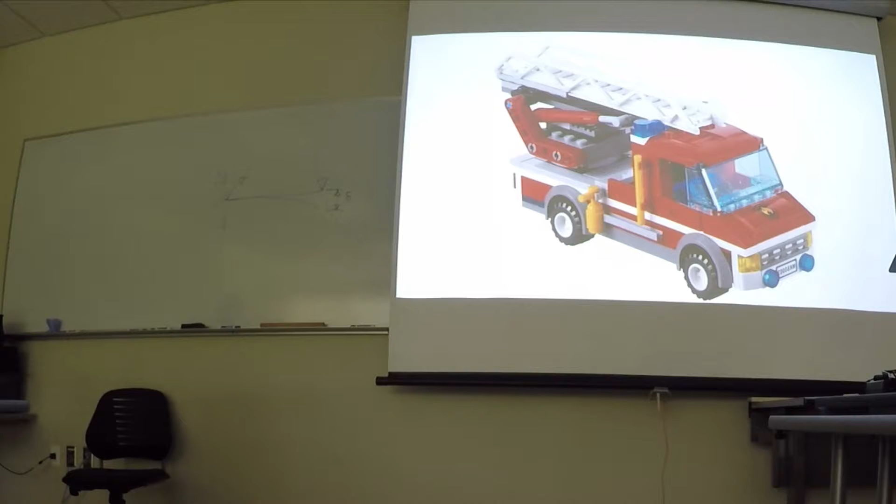Okay, you're going to decide whether this building is going to stand up to, say, 50-mile-an-hour winds. You don't have to model every single bolt and every single joint of the structure of this building. So deciding where to do that is part of the task of things that we're going to learn through this.

Okay? All right, here's the catalog description. We're going to emphasize modeling and interpretation of the results. We are going to look at linear static problems for the most part. We'll have a couple other types later on in the semester, but that's most of our emphasis. We're going to use commercial software, and we're going to verify these through theoretical calculations. And I'll just tell you right now, we are going to do theoretical calculations. We're not going to be doing laboratory tests.

Okay, so you're going to have to solve a problem in SolidWorks. You're going to have to solve a problem using the hand calculation, and you're going to have to compare those two together. How do we compare two answers? Exactly, thank you. You have to calculate a percent difference. I am so tired of reading reports that say it's pretty close. Generally good agreement. Do not put that in your report.

Okay, I want you to say, here is my SolidWorks results, here is my hand calculation, they are 18.3% different. Okay, percent difference is how we compare things. So if it says compare your results, that's a clue, calculate percent difference. So I want to know how close are they to each other.

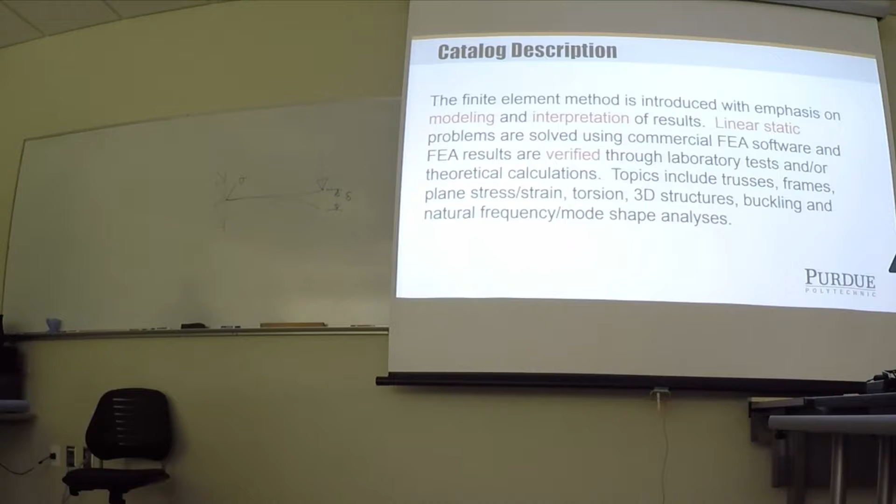All right, so general statements, if you don't know it already. Finite element analysis, abbreviated as FEA. Okay, and this is sort of like ATM machines. Okay, it's not FEA analysis, right? It's not an ATM machine, it's an ATM. The machine's already in the initials. Okay, so this is FEA, finite element analysis. The A stands for analysis. It's not finite element analysis analysis. Just like it's not an ATM, it's not an automatic teller machine machine.

FEA is a method to calculate the loads on a structure for complex situations. It allows us to do structural calculations for things that we can't pull out our 211 textbook and pull out an equation for. Okay? Now, most of what we're going to be doing in here is stuff that we can pull out our 211 book and do a calculation on, because I want you to do a hand calculation and compare it to the SolidWorks. All right?

But the software, once we know how to use it, once we're comfortable, then we can apply the inputs and the constraints correctly. We can define materials and properties correctly. Then we can apply it to problems that we can't find in the textbook. And that's the whole point. The issue is it requires a ridiculously large number of calculations. So doing this by hand is not going to happen. Huge numbers of calculations.

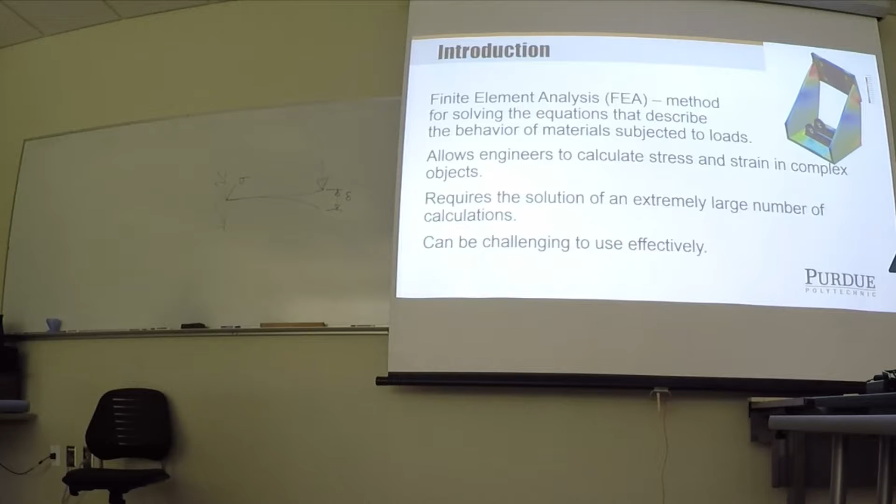All right, so the general procedure, and we'll learn more about this. We define geometry with a solid model. You guys have used SolidWorks to do solid models. We define constraints. We tell SolidWorks, how is this thing attached to something? We apply some loads to it, concentrated loads, pressures, whatever, and then we click a button to solve it.

SolidWorks creates a mesh. The mesh is a subdivision of the structure into tiny little pieces. And then it does a lot of matrix algebra to solve for the forces on each little tiny piece. And then it puts it all back together again and it outputs us a result. And usually that's in a graphical form, which is a colored graph of the problem. And that's color coded. Usually red means high stressed areas and blues and greens mean low stress areas.

Okay? So the general procedure is take a complicated structure, break it down into little tiny simple pieces, do the math on the simple pieces, and then put it all back together again. Okay? So that's in a nutshell. That's what the computer is doing. And by doing it that way, then we can solve complex problems.

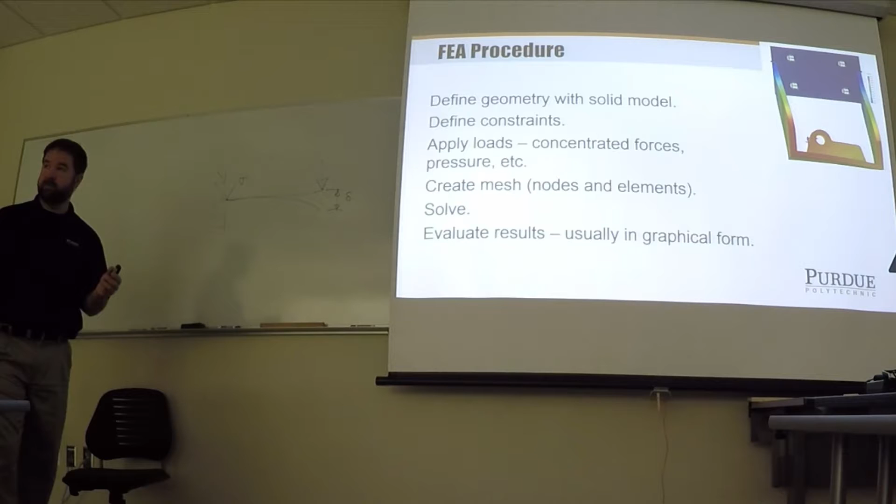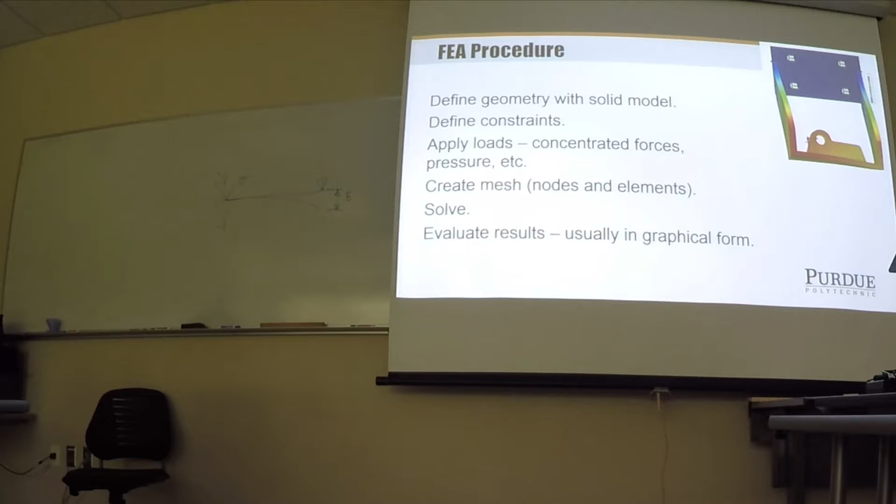And this is used in a lot of places other than just structural places too. I think you hear about people doing weather models that predict the weather. Well, they're taking little pieces of the atmosphere and they're putting in a bunch of constraints and a bunch of inputs, and they're solving it for how it all reacts together. And then it comes up with an output, which is the prediction of whether it's going to rain tomorrow or not. Okay? So it has lots of different applications. We're going to focus on the structural applications because we're mechanical people.

All right. Modern FEA, some of the big software packages, of course, are SolidWorks, which is what you guys are familiar with. ANSYS is a specialized FEA program. In my opinion, it's superior to what SolidWorks has, but it's a separate whole thing. I'm not going to teach a whole other package just for the point of teaching how to do FEA. So we'll stick with SolidWorks.

So of course, as we already talked about, we've had huge increases in computer speed and capacity. The models that we're going to solve will probably solve within seconds. Worst case scenario might be a minute or two. I don't want to harp on stories of back when I used to have to walk to school both ways uphill in the snow kind of thing. But when I was working in industry, it was pretty typical to let models run for days to spit out the numbers. So even just 15 years ago, the advances in the computer speeds and memories and so forth has made this easier and easier to do.

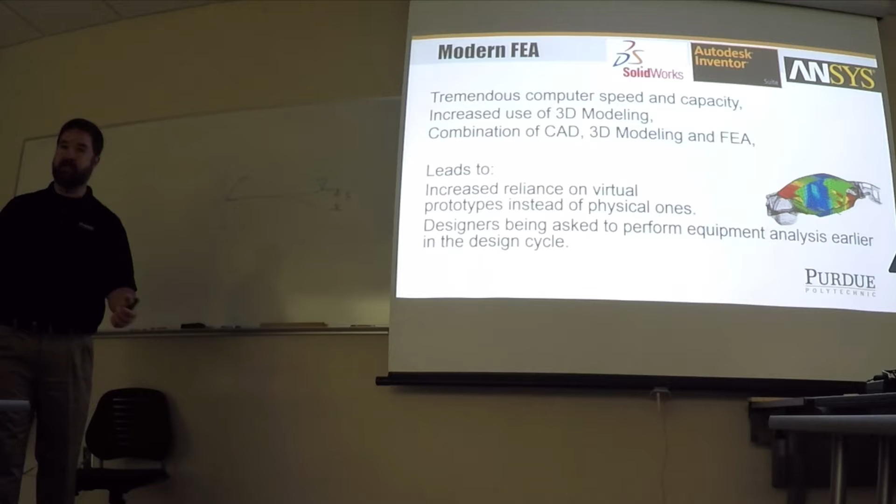Probably the same kind of analogy with the way computer graphics in movies has changed. If you go back and look at one particular example I can think of, there's a movie, Air Force One with Harrison Ford, and there's a scene at the end where the airplane crashes into the ocean. When I watched the movie the first time, it was okay. It didn't really bother me. But the computer graphics are awful. I mean, horrible. And now watching it, it's like, oh my God, I can barely watch this crash because it's so unrealistic.

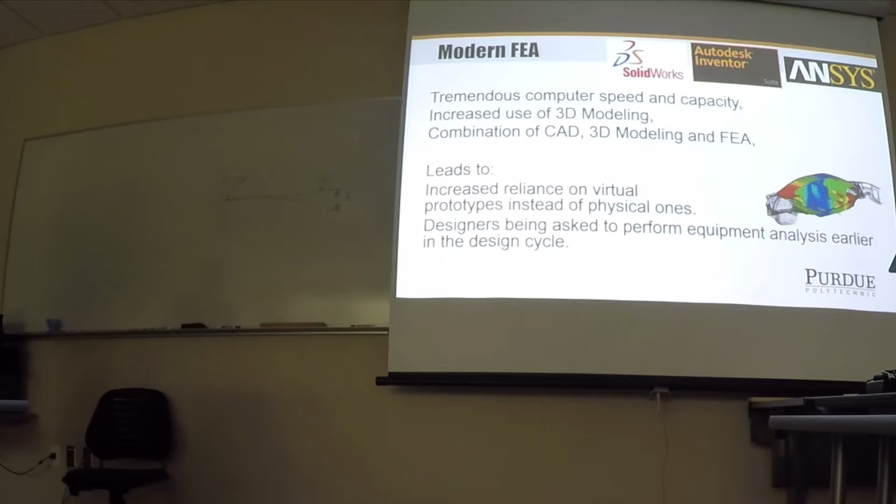But it's a function of when that movie was produced, and the computer hardware and software wasn't as good as it is today, and you couldn't make it as realistic as it would be if we did that today. Okay, and you can tell it. So the same thing's going on with our software here.

I put this on here. This is getting perhaps a little bit dated, but I left it on here anyway. There's not too many traditional drafters around anymore. Almost everybody is a modern designer. I don't know if you guys even see the traditional drafter, but when I first started working as an engineer, the company I worked for literally had people still doing hand drawings on boards with pencils.

So that would have been going on 20 years ago now. So about 20 years ago, they were still doing some paper drawings at the company I worked for. So obviously, we're not talking about that type of drafting. Now almost everybody is doing CAD work. And the issue is that the software has gotten so good that those designers can use FEA to start analyzing problems. It's in the software package that you're using, so you can click through and do it.

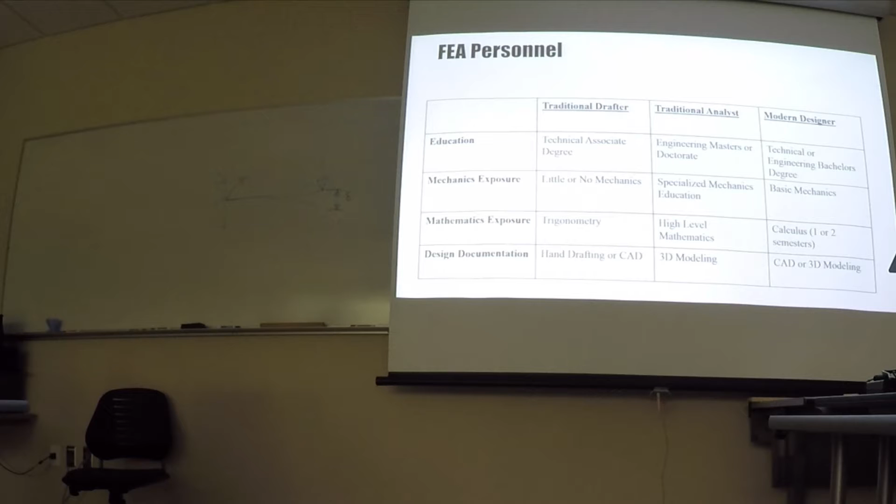And so my point today is to teach you enough about the software that you can be skeptical, so that if you're working with a designer that is doing this for you, you can ask some pointed questions to make sure that the pretty pictures that are coming out are valid. Okay? All right, a little bit of history.

A person named Courant described a polynomial solution for a torsion problem, which was the mathematical beginnings of the finite element method. Companies in the 1950s started using the method. The problem was back in that time that Courant actually did this by hand, and it was a relatively simple problem, but the mathematics was cumbersome and it wasn't very efficient.

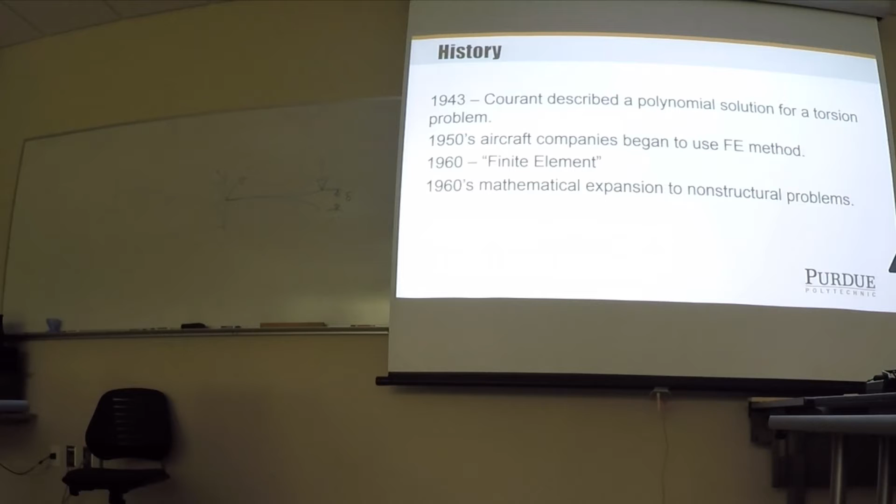We're going to do some hand calculations. Your first assignment is some hand calculations, and we're going to use probably a 3 by 3 matrix at the most, and you're going to hate me for it because of the amount of calculations involved. And we're talking about matrices that are millions of elements, so doing that by hand is absolutely ridiculous. So the value of this is that once we develop computers that can do all the number crunching for us, then this becomes practical. And that's why it's so useful for us today.

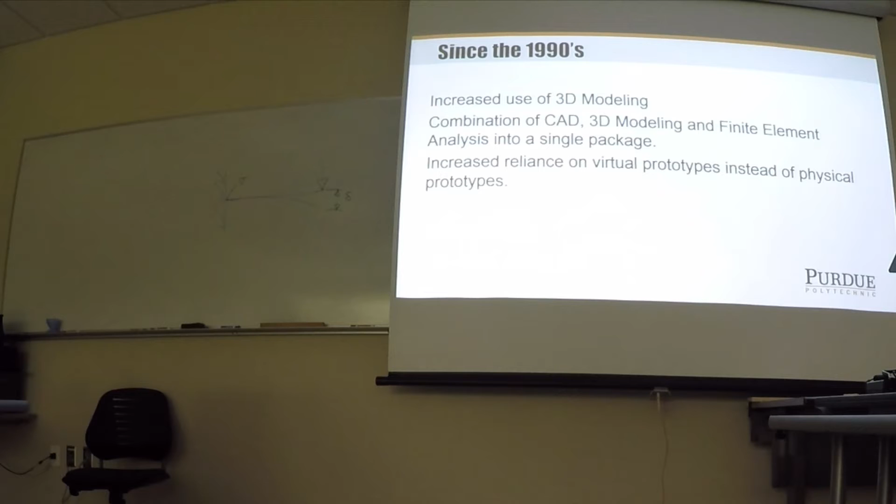So I think we've talked about that already. Increased reliance on virtual prototypes instead of physical prototypes. I think that's kind of obvious. So the concept is we take a structure and we divide it into nodes and elements that connect the nodes together. It looks like my graphic there is overlapping my words. The mathematics of this is a very large system of simultaneous equations. And we solve simultaneous equations with matrices. So the thing we're going to do today is refresh a little memory about matrix manipulations.

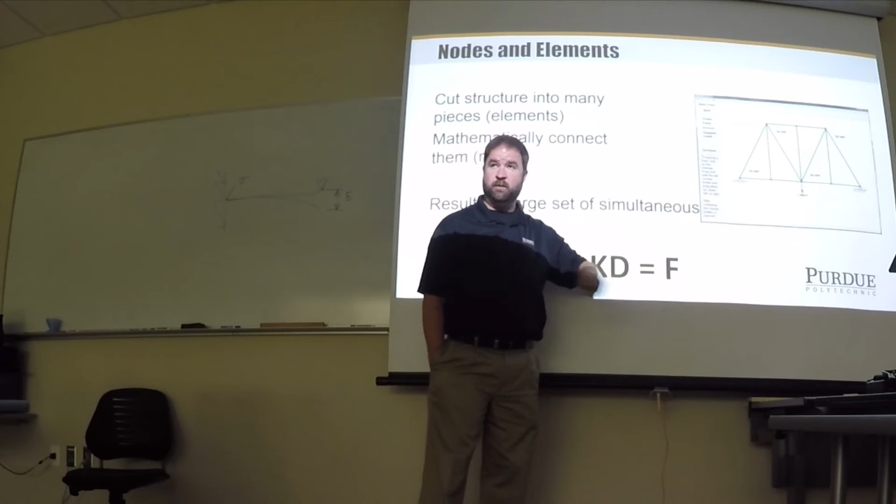But the equation that we're going to be solving here is this really simple one that you need to know. Our equation for all of this is KD equals F. K is a stiffness matrix, D is displacements, equal to the forces applied. That is our fundamental relationship. And if you think about that for a second, have you seen that before? Yeah, springs. That's a spring equation, isn't it? So this is totally analogous to springs. We're just doing this on a large scale.

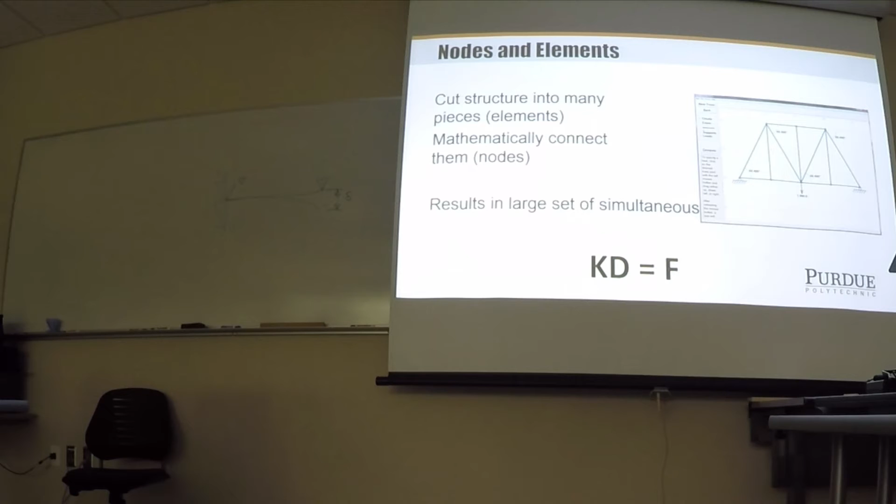And instead of F equals Kx being just single values, these are giant matrices. So our stiffness matrix is a giant matrix of numbers. Our displacement matrix is the displacements of every single possible node. And then our force is a list of all the possible forces that are in the structure. And we're using the computer to solve those matrices for us. Another definition of FEA is piecewise polynomial interpolation.

We're taking a structure, we're dividing it into smaller parts. Some of these concepts are sort of like calculus. You think back to calculus, you want to find the area under a curve, right? I think you guys have done this before, you have some curve, and in calculus, you're given the task of finding the area under that curve. You guys done that? I get some nods, so you've done that. Find the area under the curve. We can use calculus to do that.

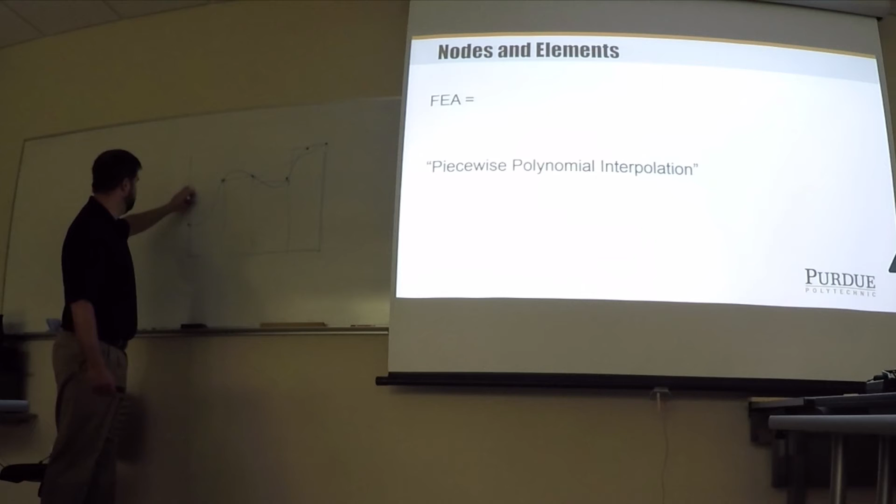We can do piecewise algebra to do that too. I could take this and divide this into one area, put a dot there and put a dot there, and this is my area. That's one approximation of the area under that curve. As a piecewise polynomial interpolation of this, I could do multiple dots, several dots on here, and do rectangles for each of these dots. Well, that one's probably not right, but this kind of thing. And as my rectangles get smaller and smaller, I'm going to get closer and closer to the true area underneath that curve, right?

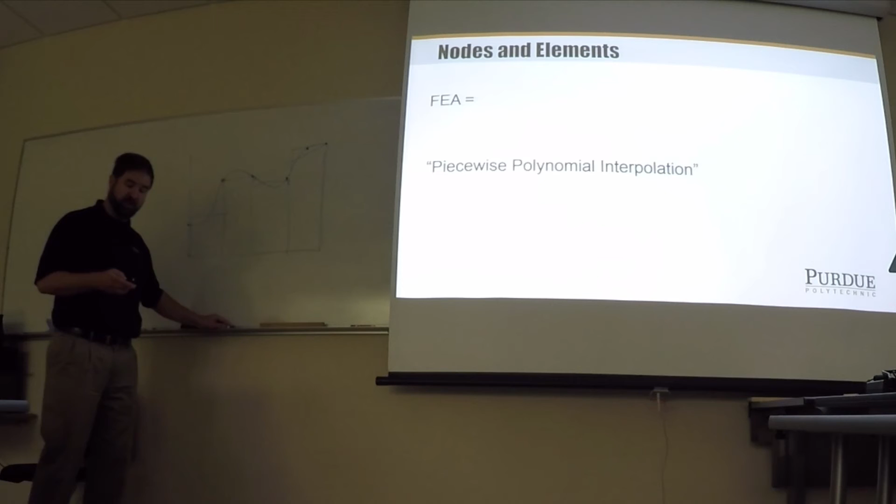But as my rectangle gets smaller and smaller, I've got more and more calculations that I have to do. So we're doing the same thing here with our nodes and our elements. We're going to split our structure into elements. Depending on the size of our element, we're going to get closer and closer to the right answer. So ideally, we have an infinite number of elements, and then our model should match our reality perfectly.

The problem with that, of course, is that as I go to an infinite number of elements, I need an infinite amount of storage space, and I need an infinitely fast computer to do all those calculations. Okay, so we have to come up with a balance between how many elements are good enough to give me a reasonably good answer, but don't take a ridiculously long time to do it.

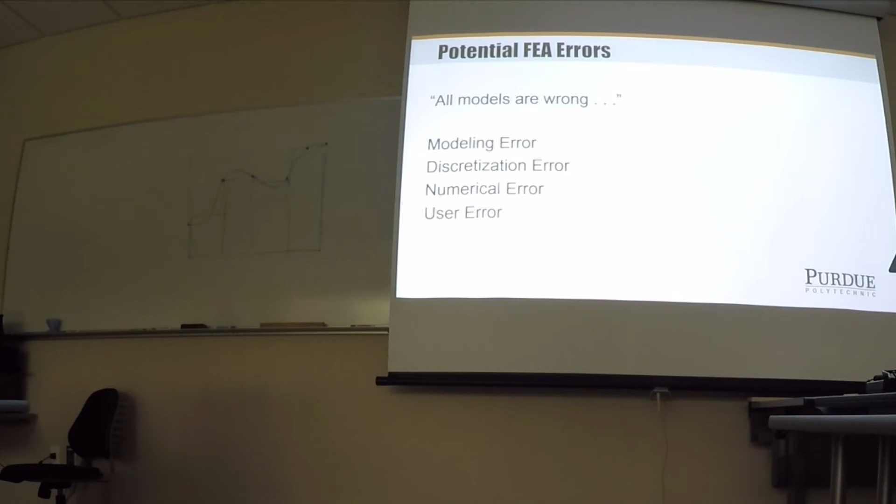All right, so finishing up this PowerPoint, back to our statement at the beginning, all models are wrong. I'm going to define 4 types of wrongness: modeling error, discretization error, numerical error, and user error. Modeling error comes from that the finite element analysis is a mathematical model of physical reality. We simplify things, we make assumptions that might be wrong.

Okay, I told you earlier we don't typically model the bolts of the structure. Well, that's a simplification, but it's going to introduce error to our results. Particularly if, say, our bolts are the weak link in the thing, and that's what causes the building to fall down. Well, if we didn't include the bolts to begin with, then obviously that's a big problem. Okay? The other thing with modeling error is that the physics of the physical problem might not be completely defined or understood.

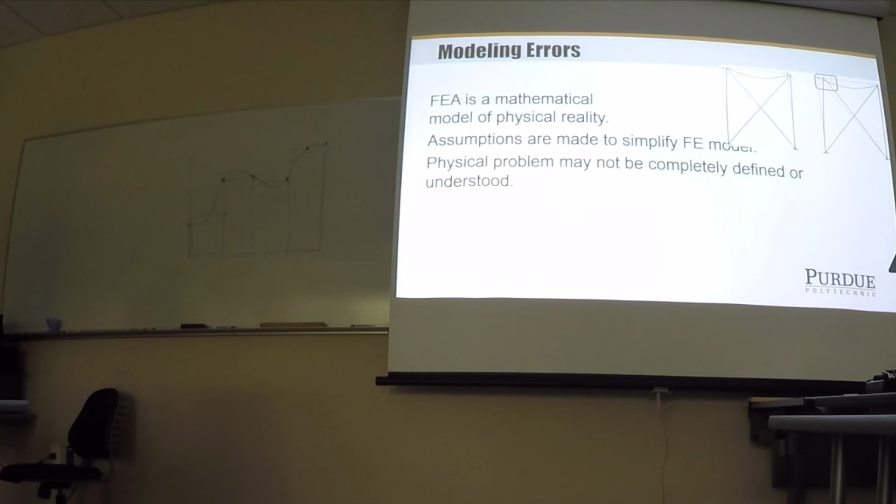All right, maybe that goes back to the mountain board issue. The person that did the analysis didn't understand completely what buckling meant versus the way you stand on the mountain board. And so you can't apply the analysis correctly, so that kind of goes into user error too. But if we don't know exactly what's happening physically, then that's going to introduce some errors because we're going to have to make some guesses on what's happening. Okay, those are modeling errors.

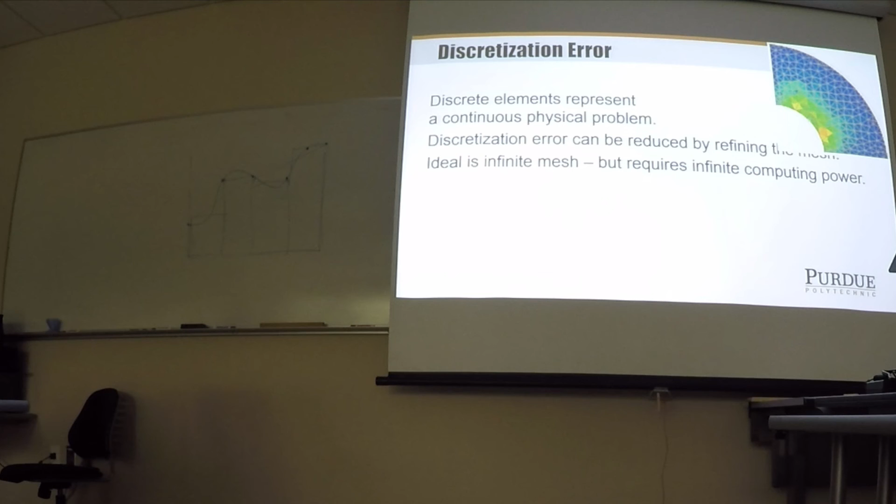Discretization error is a thing I talked about where we're dividing our structure into small pieces. As the pieces get smaller and smaller, I get closer and closer to the answer. But I have limits on computer hardware, and I have limits on time that I'm willing to spend on this. And so that falls into discretization error. What we should see is that our error gets smaller and smaller as I get my mesh finer and finer. And we'll talk through the semester about techniques for refining the mesh to get the improved results.

Numerical error comes from rounding and truncation of numbers in equations. It can also come from bugs in the software. This is unlikely to happen, but it's out there. I put in Poisson's ratio equals 0.5. Theoretically, Poisson's ratio of 0.5 means that we have an incompressible substance. Some rubbers have that characteristic. And the problem with that is that in the math and the equations, if you put in a Poisson's ratio of 0.5, you will cause problems for the software. Numerical instability, divide by 0 type of errors.

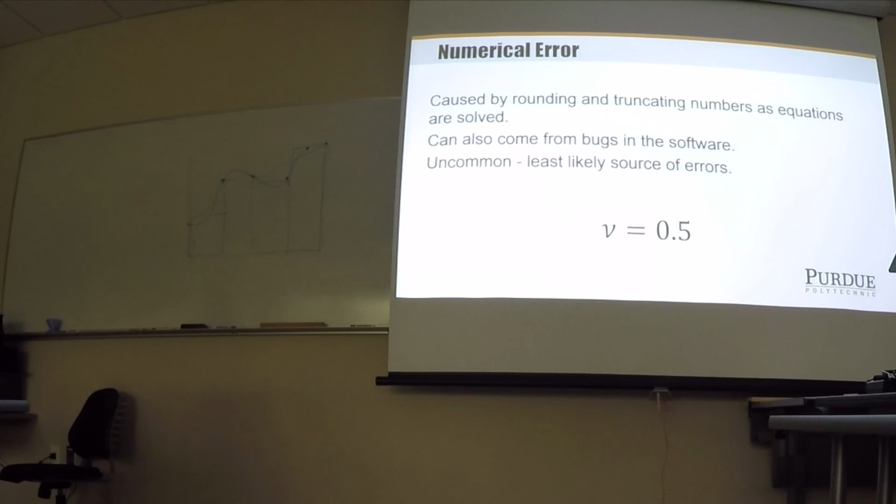All right, so if you're dealing with a rubber that has a very high Poisson's ratio, you put in like 0.49 instead of 0.5. So just be aware of that. That's like a special case. But years ago, when people were first developing the software, it actually crashed the program. Most modern software has things in there to check for those kinds of simple errors. But just be aware that you're going to create numerical instability. That means you're going to get runtime errors. Sometimes you'll get a message that pops up that says SolidWorks is unable to solve this problem. That could be a possible source.

And then user errors. We can click the calculate button with zero understanding of what's going on. You might get lucky and you might get a good result, but obviously more likely to not get a very good result. We can also make small mistakes. You forget to put a force in there, you forget to put a constraint in there, you put a constraint in the wrong direction, all of those kinds of things that will throw off the answers.

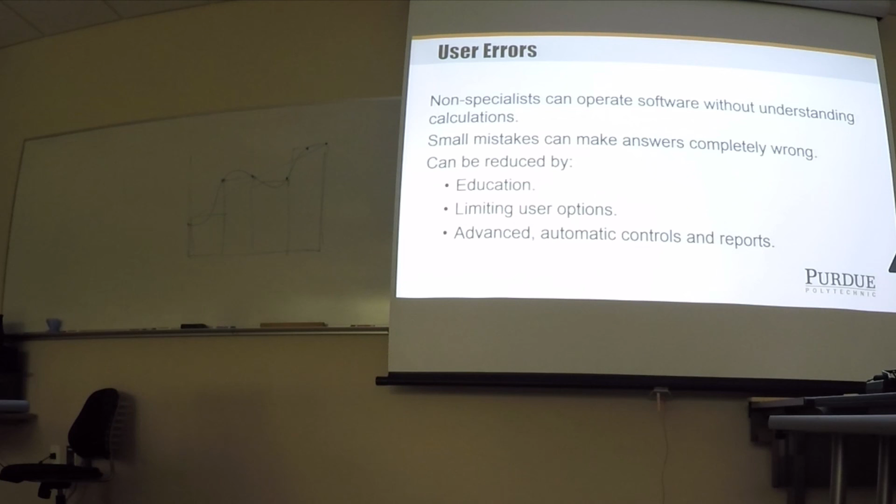And so we reduce those, and I will harp on it. You know, education is what we're trying to do so that you reduce the likelihood that those types of things happen. Okay? All right, I think that's all I had in that slide. Any questions about that?